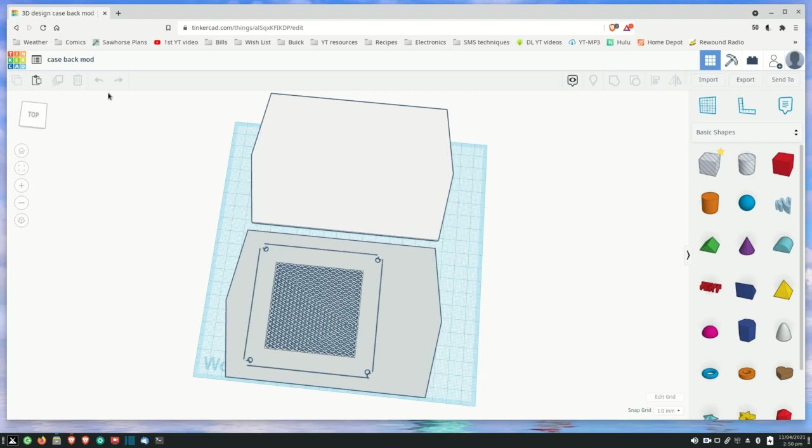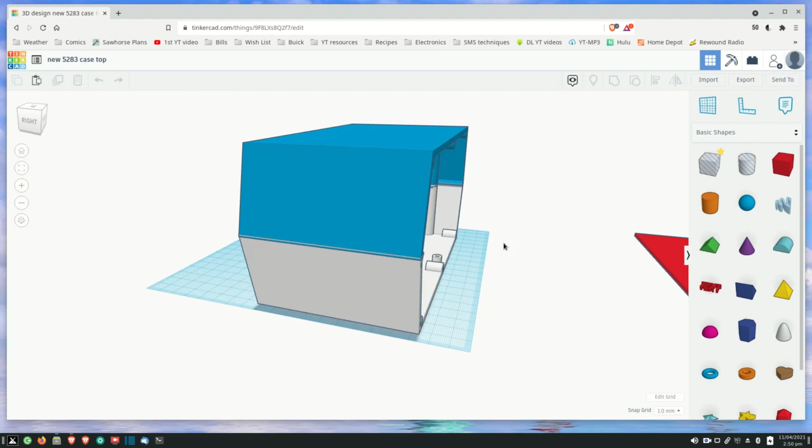So what I did was design something else. And that was this item here, if it ever loads up there. There it is. Not sure why there's something in the middle of it, but there it is. That's what it came out to be.

This is the one we settled on and are going to be using in our little experiment here. Not experiment, I kind of wanted to do this all along, and I wanted to make one of these. But the 3D printer just made it so much easier to just go ahead and design one for it. You can see in this case here it has the speaker opening. Now it's off a little more long here.

This actually matches the dimensions of the original. I found several pictures online and took a ruler and measured the screen to where I could get the aspect ratio of what this was. I think this was 9 inches here, this was 8 inches down here, and that's really all you need to know so you can make the whole thing. And then I measured from the top to the bottom also. Once I did that, I came up with the basic design.

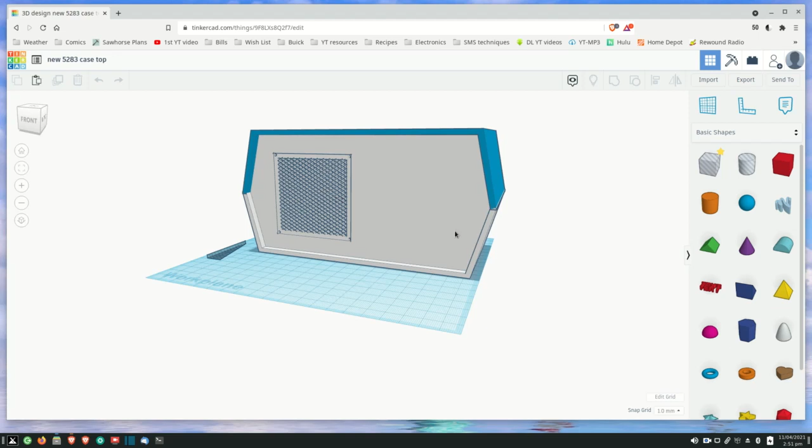Now, of course, the sides may not be exactly correct as far as the other one, but that doesn't matter that much. I just wanted something that kind of looked like it. I even colored it blue, as you can see there. So that's kind of neat.

There's the inside. Now, these little standoffs here are set up for a PCB. And so that's where Bob got involved. We went over it, and I ended up taking the schematic from the original PDF of the assembly manual and condensing it down to just basically the signal tracer portion of this. It has another function, an audible voltmeter I think is what they call it, something of that sort. That would never ever be, and in fact when I had one I never ever used it. So that's really not important to me. Also, the external speaker thing, that's not a big deal either, although that could be added very easily if I needed to.

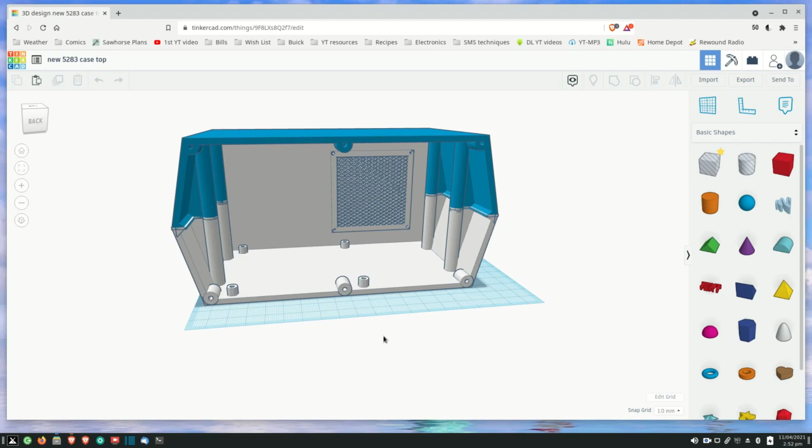But like I say, this is what it looks like, and let's move this out of the way a little bit here. Yeah, there you go, get this over to the side here so we can see what's here. Now, there you go, we can see this. The bottom standoffs that screw the case halves together.

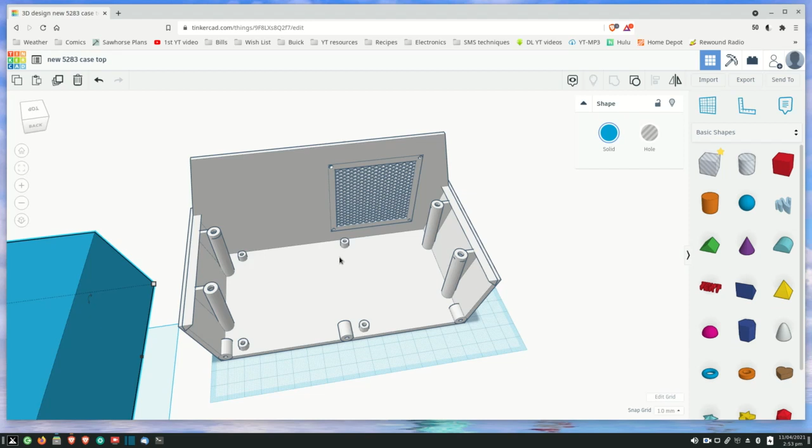Now, I put these flat parts here too. I wanted something for it to rest on. It seemed like when I had just like the other one I did, just this part here, it didn't line up really good. So I actually wanted to do this first. And so we did, and also I put gussets in there, as you can see, on each standoff that run the full length of the case and the standoff itself.

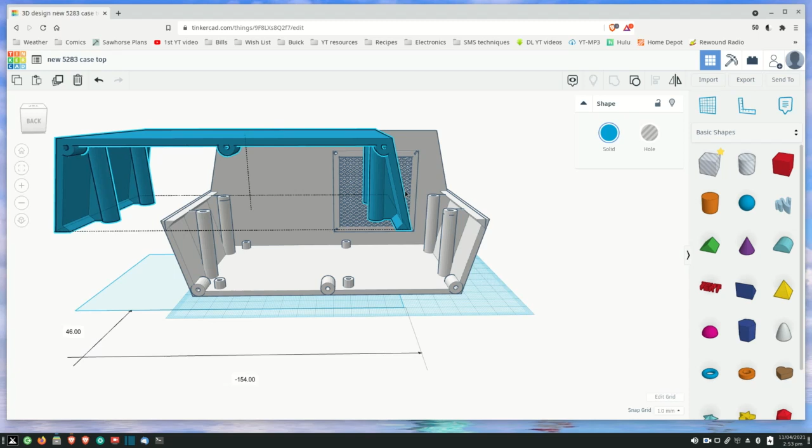These ones at the bottom, you see three of them, will be used to screw the back in, which was red over there. I don't know if you can tell what it looked like, but you can see they're the same ones on the top - there's three on the top as well. So basically, there you go, that's what that looks like, and we want to put this back in shape where it was.

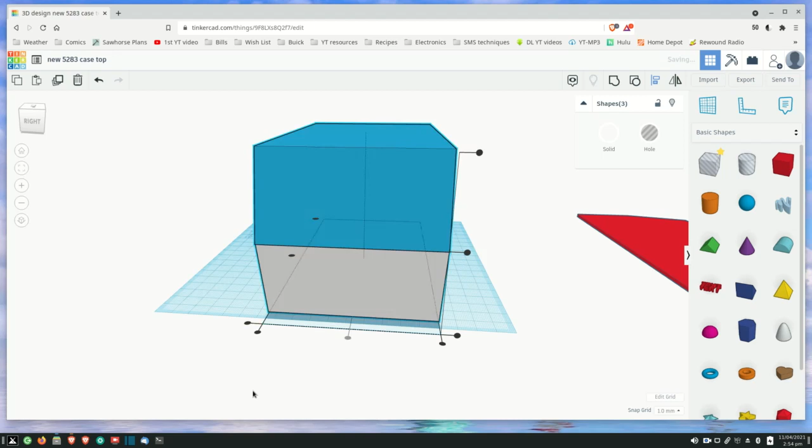Let me do that real quick. There we go, now it's back. But anyway, like I said, there you go.

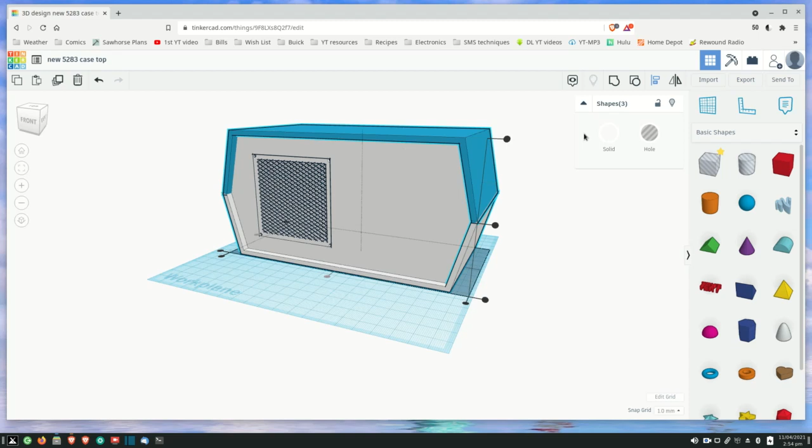I'm going to show you a picture here when we come up, go down to the schematics, and we'll look at that, and then I'll show you a picture of what I did. I put the volume control in there, and the input jack, and even put some writing up here. Just wanted to show you what it was going to look like. But next, I think we need to go over to the bench in the shop and actually see how it turned out. Let's do that, and then we'll move on down to the schematics after that. So join me for that.

All right, well, now you've seen the picture of the artist's conception of this device here. And this is actually the device - the case, whatever you want to call this thing.

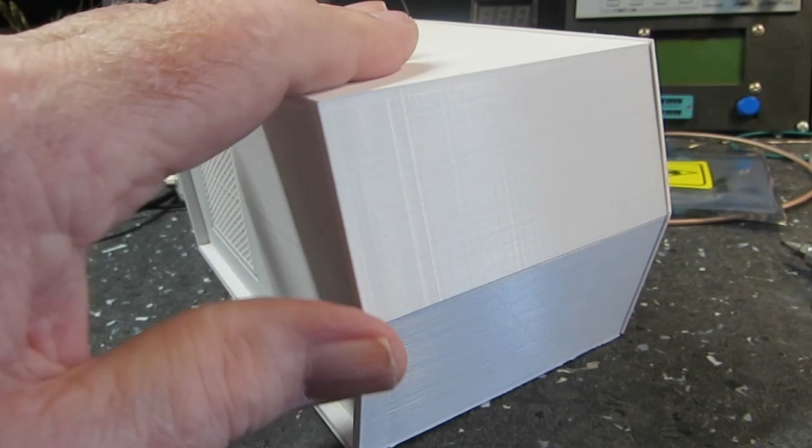I showed you the separate parts of this in Tinkercad, and you saw that the bottom piece - I'll turn around here a little bit - the bottom piece here is part of this, all made together, and the top is the only other separate piece, printed on its own. And the back is the same way, also printed on its own.

And so there you go, there's what that looks like. And I think it turned out rather well. I'm very happy with it, very pleased indeed.

As I think I mentioned, if I didn't I'll mention it again - Bob has all the electronics on the way for this. He paid for the volume control switch that'll go here, and I have some audio jacks, one of which will go here as the input. And then on the back side will be the power - I have a power plug there. I've got some of those, I think 5.5 millimeter or whatever, the common Chinese type that everything powers by.

Got some of those with the screw on the back, and then between the back and where it actually connects to the board, I'll put one of those JST connectors - I believe they're JST red - in there, so that if I need to take the back off and work on something, I can do that. There's still a screw here and a screw here that hasn't been drilled yet.

I just wanted to get something together, and it does have the bottom four screws that screw into the top to hold it together, and it's really stable. It's nice, and it will work out really good.

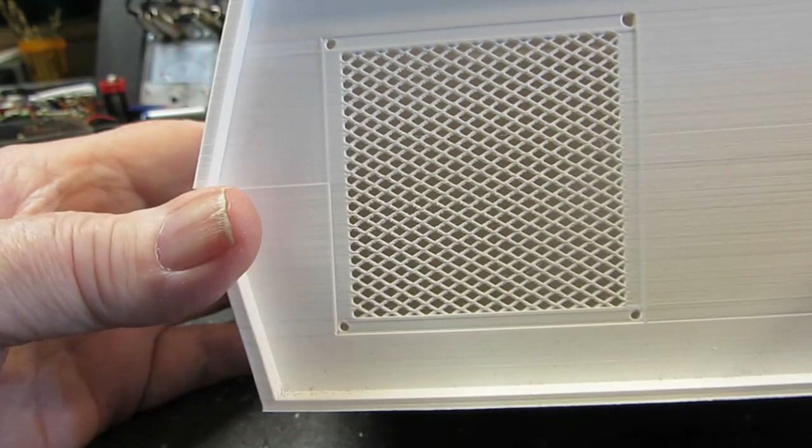So far, so good. Now, Bob, as I mentioned, has electronics coming. In addition to the electronics, he bought 2 16-ohm 3-inch speakers that will fit these holes, hopefully.

The one I bought out of California was measured for 60 millimeter holes, and that's what I did on this. So I'm hoping the ones he bought will also fit. I made the hole small enough that in case I need to go one way or the other, out or in, it should work out.

Once I get the bottom and top painted blue, I'll mask this off and the square part right here, and paint that all silver to match the original. I think that'll look pretty good and look pretty sharp. I'm really kind of excited about it.

This is just one of those projects I wanted to do, and it has nothing to do with the BDST. This will not be sold, obviously. It's pretty much a blatant copy of the IT5283, except for the size.

I took the best pictures I could find and measured those on the screen, and found out what they were. Then I could get my ratio, or dimensions, aspect ratio I guess, of how these were shaped—the height, the width, things like that—and just multiplied it. That's all I did to get this size.

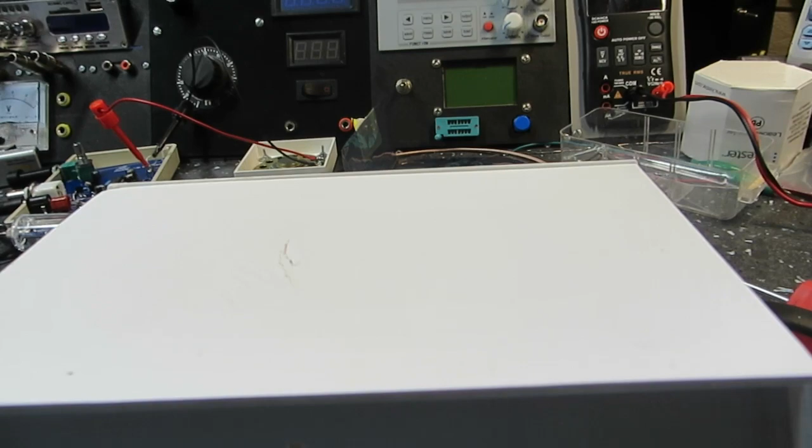He wanted 2 more, so I'm sending those to him, and that way we'll all have basically all the same stuff, and that'll be good. So anyway, that's that. Let me move on to the other part of this, and we'll sit down at the computer again, and I'll explain more about the schematic, how we came up with that, and what it looks like.

Stay tuned. Back once again. As you can see, this is the schematic of the Heathkit model IT5283X. I added the X to it.

This is just the portion that actually is a signal tracer. I wanted to point out this while we have it up here. This is the diode and the 1000 picofarad capacitor in the probe. You can see there's a switch here. If you switch it this way, it goes through that. That's the RF function. This is the audio over here.

It goes directly into the tracer. There is also a 400 volt capacitor here to protect the circuit. So that's good. And there's your ground clip over there. But other than that, here's our preamp.

Now this is basically the same preamp used in the BDST, with the exception of using 2 discrete transistors for this. And it goes through some coax here and goes over to the amplifier section. There's the preamp of the amplifier section, the audio amp, and this is the output here, and feeds that into the speaker.

Now this, as it turns out, is a 16 ohm speaker. I ordered one first from California, and it's a 3-inch speaker that case uses, and it's an 8 ohm speaker, and this turned out to be a 16 ohm speaker. So Bob got on eBay and started looking around and came up with a 16 ohm 3-inch speaker, and so we kind of divvied up the cost on this.

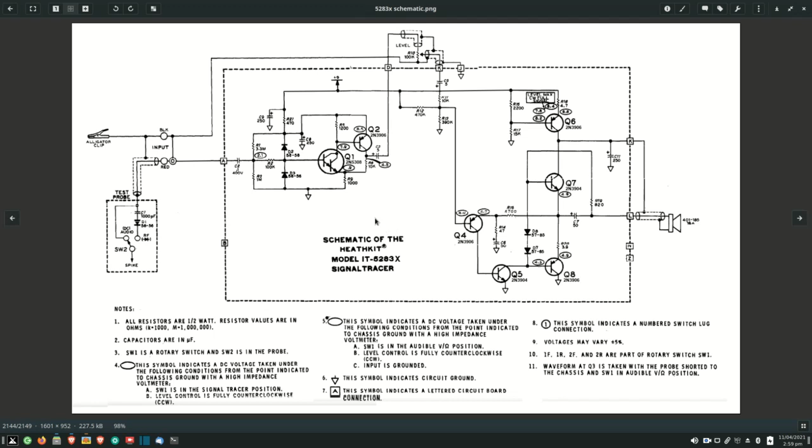So there you go, that's how that is, and that will fit, hopefully. I made it to Bob's specifications.

I designed the case to match his numbers for this, how this will fit, so we'll hope it does. If not, we may have to trim down the edges with the Dremel. Whatever it takes, we'll get it in there. It's not a big deal, but I did want to do that.

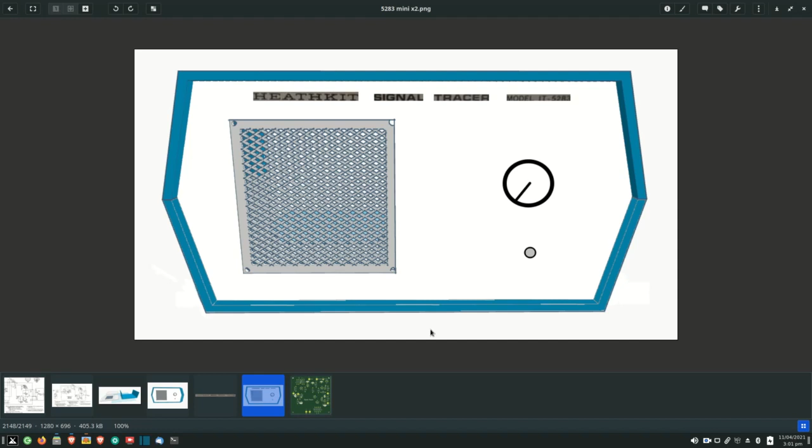Now here's another view of that - there's what I came up with first before I did the other one, but again, that looks pretty good. I think it's going to be really cool to have that. We're not going to sell these or anything like that, we're just doing this for our own pleasure, and I thought it'd be neat to have an IT5283 again, because I liked it when I had it.

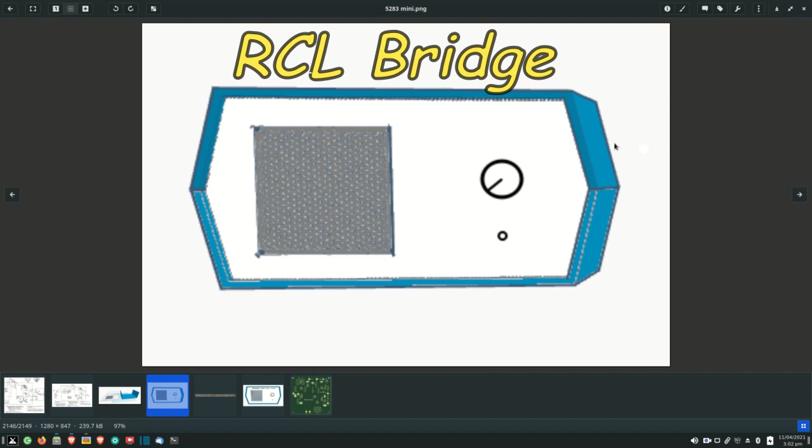I had this one, I had the RF signal generator, and I had the bridge too, the resistance, capacitance, inductance bridge, I think is what it was. But I had 3 of those, and I ended up selling all of them, back in the 80s when I had those. So kind of miss those.

And of course, I had the multimeter. I ended up selling that to Daniel, he wanted it, so I sold him that. So I had 4 of them - I think there were 4 or 5 of these, but anyway, that's what I had.

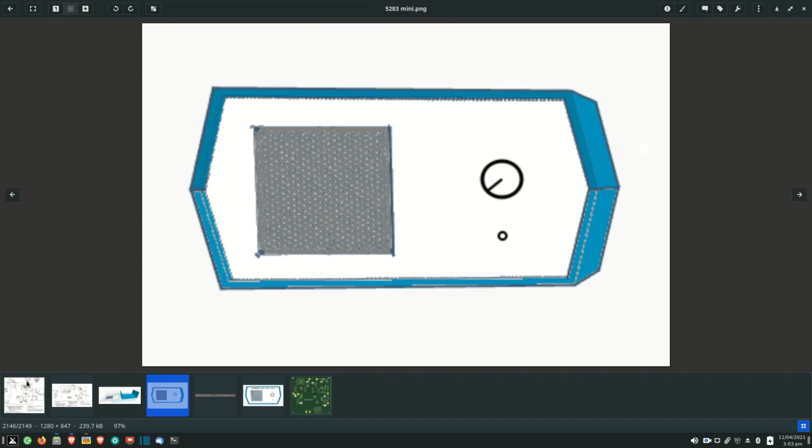Like I said, they are on the way back, so we should have that back together as soon as I get it. One of the things I wanted to show you - well, you saw the paint in the previous section when I was in the shop - I'm going to get that taped off and painted while I'm waiting for the parts to come in and get that all ready to go. I have it screwed together, as you saw.

So really coming along, and I'm really kind of excited about this. This is a fun project for me, and I know I called it a time waster, but if it's something I'm interested in doing, and it's occupying my time and keeping me from going out on the street wreaking havoc on people, I guess it'll work.